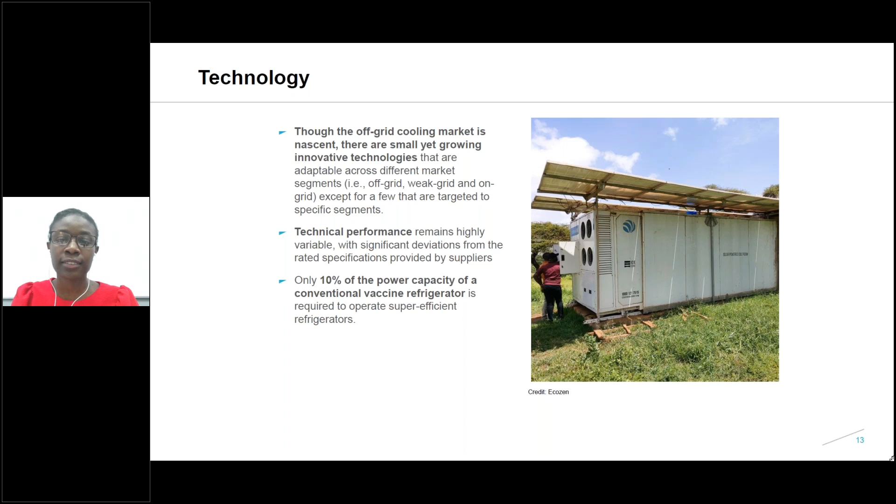And then in terms of the market, as I mentioned, the commercial markets for off-grid cooling solutions remain in their infancy, but overall, in terms of the market situation, we are seeing emergent business models aimed towards increasing access to these cooling services in communities that may not be able to afford buying the technologies outright, such as cooling as a service.

And then in terms of optimizing on the reach and trying to balance between business approaches so that companies are able to deploy this technology, we are seeing them employing a mix and combination of different business approaches.

And then looking at the supply of these cooling technologies, a lot of them currently have to be imported, especially in markets such as sub-Saharan Africa. And so that points to a real need to look into how to promote local manufacturing. And even in cases where we have local assembly outfits, the key cooling components and power components needed for these technologies still need to be imported into the countries, and that has implications for overall affordability.

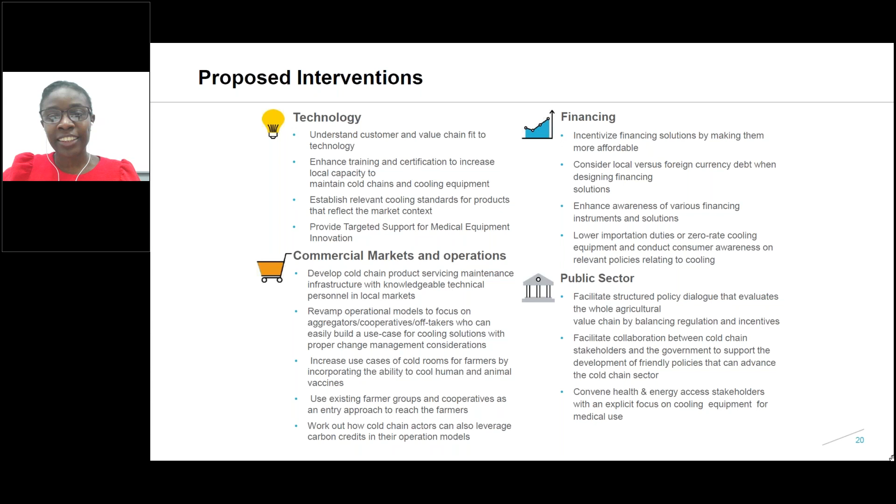Thank you so much, Ruth, for setting the scene and bringing many nuances of the cooling spectrum to our audiences, starting with technology, how to finance, and what roles the public sector could play, as well as how the private sector with farmers cooperatives and other NGOs can also come together to raise a voice and intervene more in the spectrum to form a more enabling environment for implementation of cooling technologies. Thanks a lot for this very informational intervention.

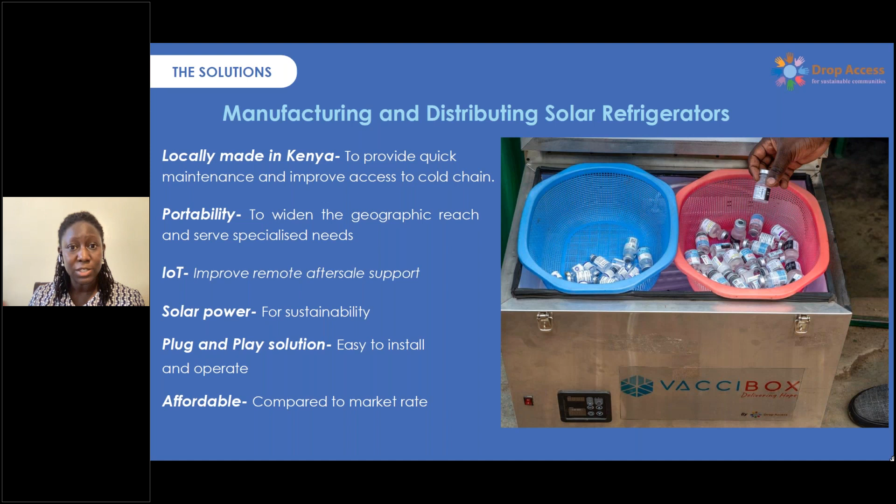And there's the issue of affordability. Cooling is still quite unaffordable. Look at the healthcare space in Kenya, where to get a solar refrigerator is upwards of 3,500 USD. For a rural community, a rural healthcare clinic that is level 2 and below, that's pretty much the entire cost of the facility. So it's quite unaffordable for them to get this cooling. Next slide, please.

Excuse me, I have a cold.

One of the products that we're offering here in Kenya is called the VacciBox. The VacciBox is a portable IoT-enabled solar refrigerator that is portable enough to be mounted on the motorbike, the bicycle, to be wheeled around, to be carted, just to improve the geographical reach. It's also solar powered to ensure that it's always running in real time, even on the bicycle; it has the battery backup that ensures the fridge is actually operating, keeping the vaccines at the best temperature as much as possible.

So VacciBox is also IoT monitored because we know it's not just enough to keep vaccines cold or even drugs cold. It's also equally important to ensure that we're able to build traceability and also ensure that monitoring standards have been put in place so that vaccines never go bad. And if they go bad, we're able to trace back and see what actually went wrong. Is it the battery? Was the door open for too long?

And these kinds of structures are helping to build traceability within the healthcare sector and helping governments like the government of Kenya to appropriately plan for healthcare programs. So the VacciBox goes for 2,000 USD, which is pretty much affordable compared to the 3,500 USD refrigerators for the healthcare sector. Next slide, please.

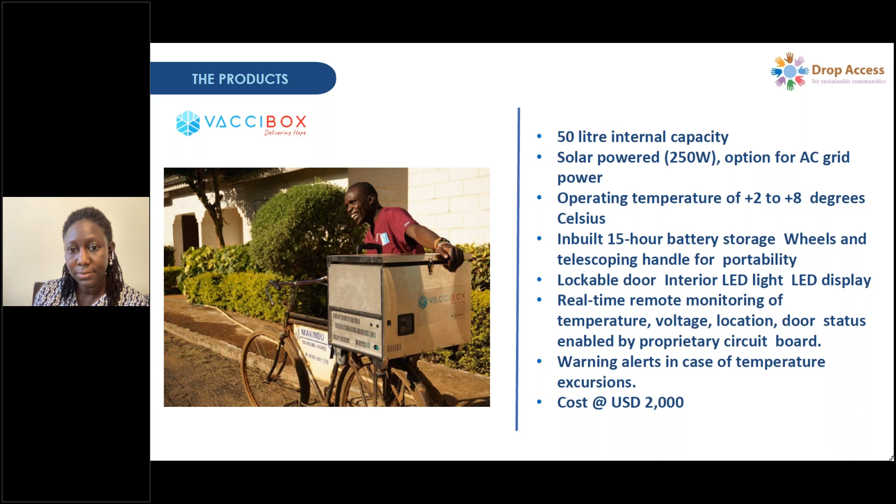So far, Drop Access has been able to manufacture quite a number of refrigerators. We are on the third iteration, going to the fourth by the end of this year, to just build a very robust product. But we're so lucky because we started this dream of building vaccine refrigerators here in Kenya. And we've been able to serve over 23 sites that are serving 50 plus communities here in Kenya with vaccines, with oxytocin for women who are in labor.

Our track record spans from providing vaccinations for children, COVID-19, ensuring that mothers actually do get a chance to have the baby at any time of the night or any day because there's oxytocin available, and also the other available medical items such as blood.

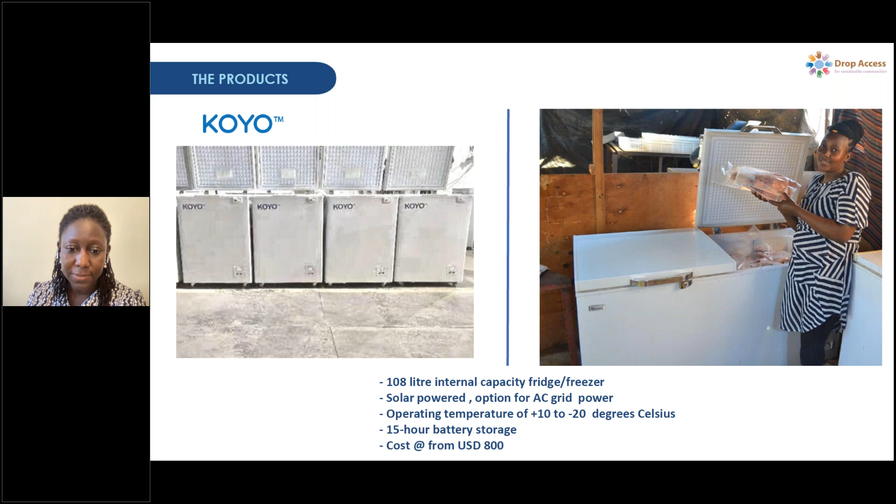Now, from the work that we've done, piloting VacciBox within the healthcare communities and also delivering Koyo in the food market in Kenya, what we've learned, or rather best practices that we see here, is that efficiency is key. The more efficient the technology is, the better it's going to serve the farmer. And also the better the food security is, but also it guarantees this farmer that the money they're putting out there purchasing this thing is actually worth it. And that, to me, I feel is a moral way of doing business within the energy space.

So we also see that we must integrate passive cooling technologies and energy storage. For us, we choose PCM as our energy storage because PCM is much more efficient and gives a better guarantee. For example, with the VacciBox, WHO recommends that the fridge must be able to maintain the cold for 3 days. Worst case scenario, the battery spoils, the solar is not working. To maintain 3 days, energy storage such as PCM comes in really, really handy. That must be integrated with this technology to ensure that the impact still continues beyond any wear and repair that has occurred in this refrigerator.

Another thing that we've learned is that monitoring and data analysis has to be part of the progress, to be able to track the energy consumption, the performance of the refrigerator, and also the efficiency of the cooling system. Not just for us as the manufacturer or as the technology provider, but also for the end user. Eventually, payment could be on a performance basis.

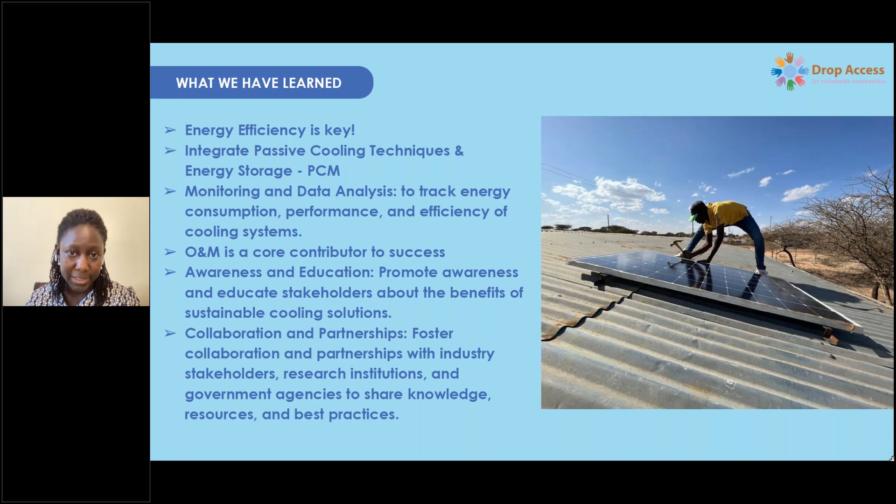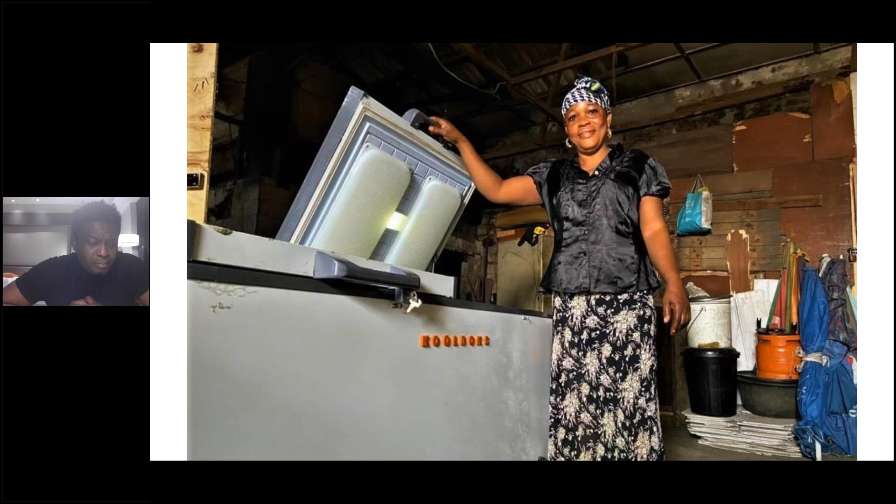So my name is Ayoola Dominic. I work for Koolboks as one of the co-founders, and we pride ourselves on the fact that we want to make refrigeration affordable and accessible to everyone that needs it. That's our main goal, basically. Next slide, please. I'll make it really short because I really want to focus on the case studies, who our customers are, what we do differently.

So this is Mama Ibadan. Mama Ibadan is one of the first customers we had. The first time I met Mama Ibadan, she told me that one of the best decisions she made in her life is actually getting a Koolboks solar freezer. She doesn't have to throw her frozen food away in the nearby river again. She said she now makes more money compared to before she got the Koolboks solar freezer. Next slide, please.

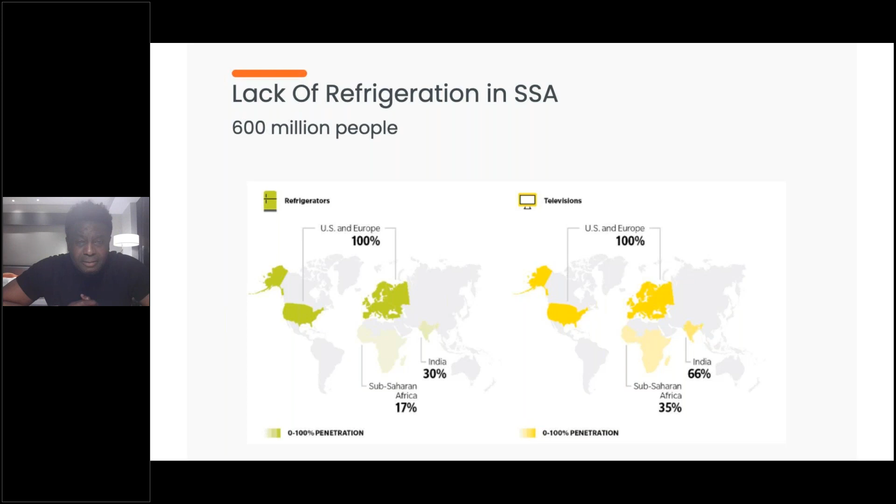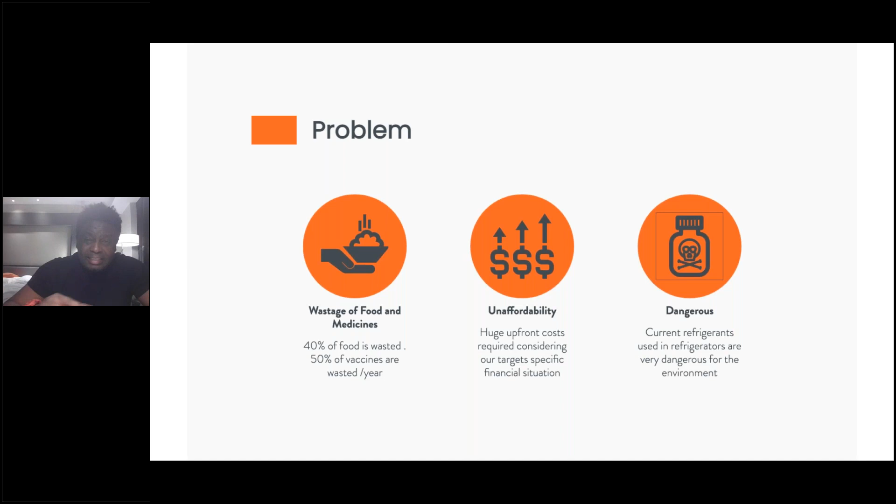So using the force of the sun and water, which is very abundant in sub-Saharan Africa, Koolboks created a unique solution that would generate refrigeration for up to 4 days, whether or not you have power or whether or not you have sunlight. And I'm sure you're wondering, what solution is this exactly? Next slide, please.

So using the unique properties of water and of course of the sun, which is extremely abundant in Africa, we created a solution that is able to generate refrigeration, whether or not you have sunlight or power, for up to 4 days. And this we did by storing energy in the form of ice rather than just in batteries. Next slide.

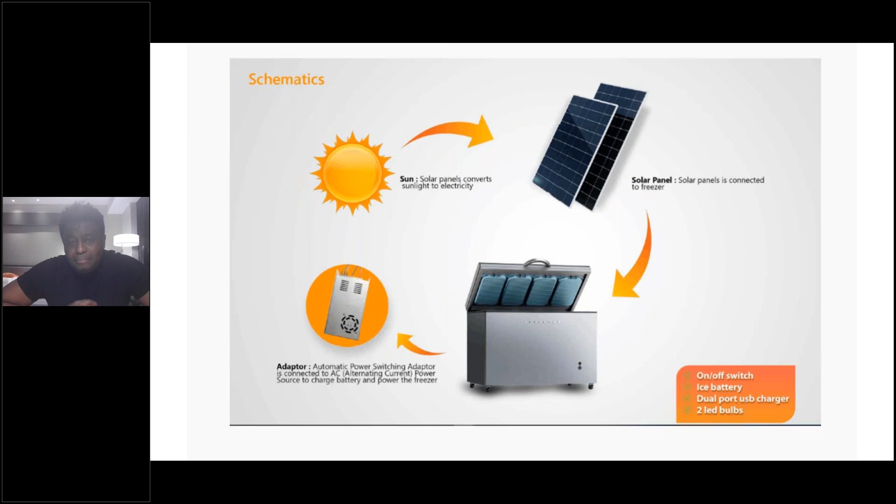And of course, we have different customers with different cooling needs. Some customers' priority is to cool drinks, some customers' priority is to cool frozen foods, or fresh foods. So it's not all customers that want to freeze, neither is it all customers that just want to refrigerate. And this brings us to the next phase of the innovation. Next, please.

So rather than just focus on customers that want to cool, we thought about people in aquaculture who want to actually freeze. By so doing, we integrated what we call ice batteries that are actually removable or replaceable. So no matter what your cooling need, you are able to use a Koolboks solar freezer. So whether you want to cool, that is farmers on the farm that want to cool fresh fruits, if you want to freeze, if you want to make ice blocks for sale, this is what we've been able to do. And if you look at the batteries, they're actually replaceable, depending on the capacity and the cooling needs of the customer. Next slide, please.

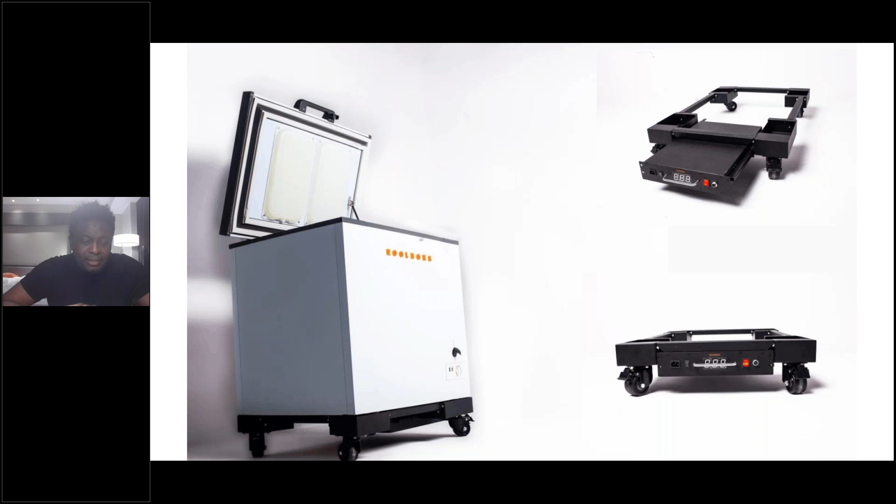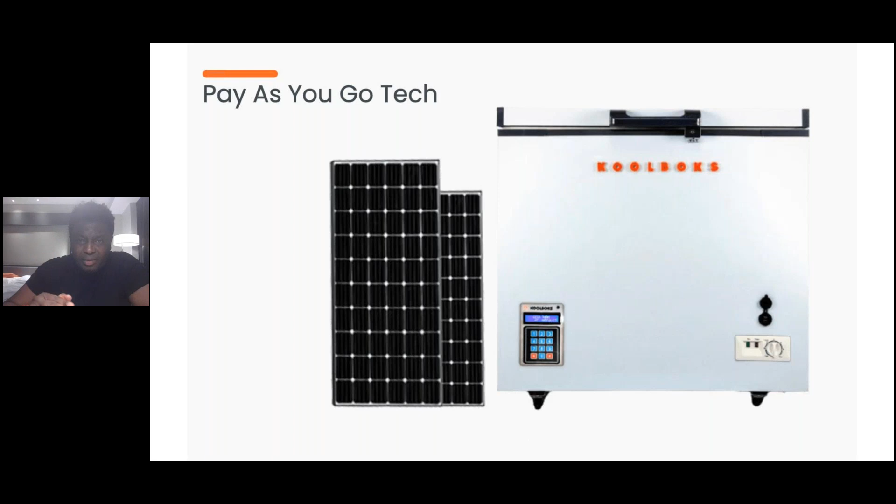So who are we and what have we done so far? Over the last, I would say 3 years, Koolboks has actually sold over 3,800 products globally with a 400% growth in Nigeria. We've signed about 18 B2B across 18 countries, including Danone, Orange, Baobab, and a couple of other customers. We've empowered over 1,700 small business owners, and we see value with our product with small business owners. Small business owners would include small restaurants, small holder farmers. 90% of Koolboks customers actually reported profitability and savings on operational costs. In fact, in Nigeria today, we've saved over 252,000 kilograms of food produce, and 996 women have reported being able to pay their children's school fees thanks to our technology. Next slide, please.

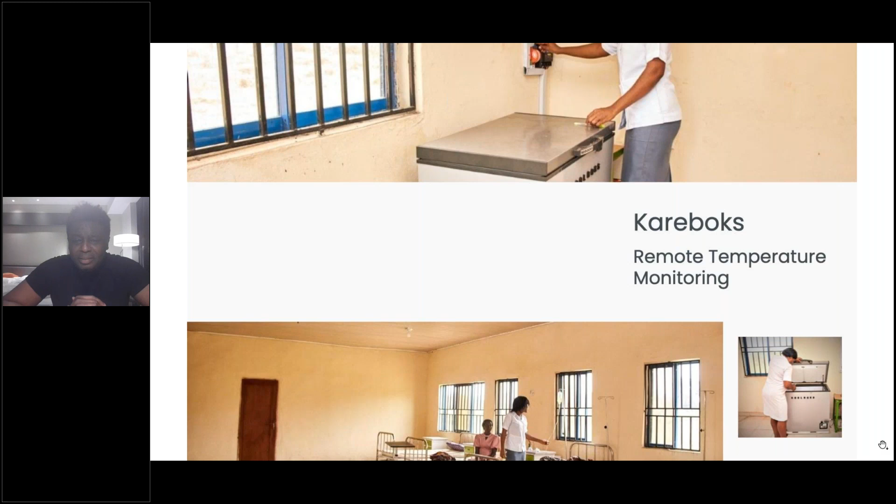All right. So I think my time is running out. I'll just make it quickly to my last slide. All right. So next slide. I think I have a few minutes to round up. Can you go to the next slide? Next slide, please.

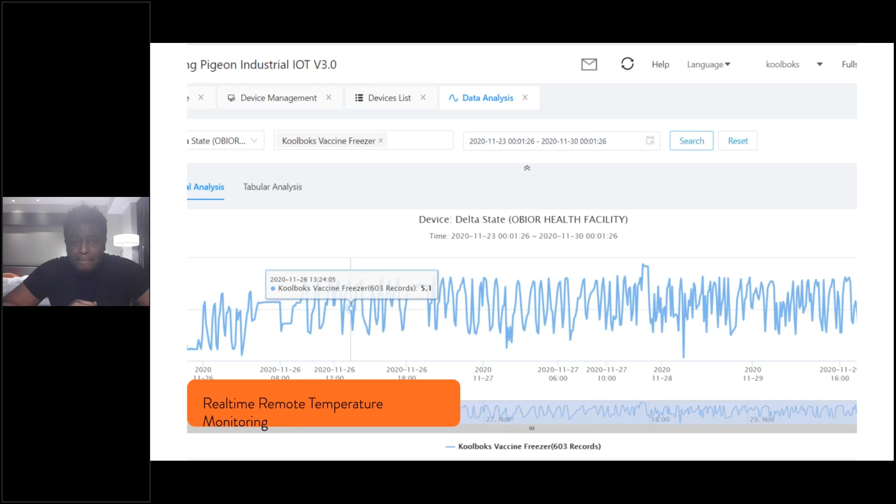So this is all about the data we get from our units, because they are IoT powered. We can actually get the temperature reading from all our systems in the field. The next slide, please. Next slide, please.

Thank you so much, Ayula, for presenting this very innovative cooling solution. I was pretty curious about the token system that you have implemented. I would also be curious to learn more about how they work from the implementation perspective after the webinar, maybe when we have an exchange.

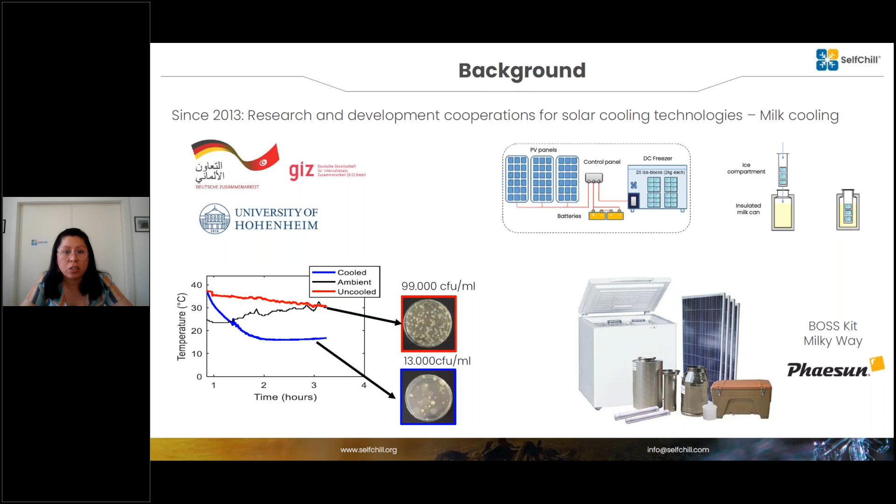Under this project, we also worked with the university under the PARI project, the GIZ, and Powering Agriculture. After the project ended, unfortunately, there were some issues regarding the maintenance of the technology. So this brings us to the challenges that we faced in this project. Next slide, please.

As I mentioned, on one side we have the negative effects usually caused by donations, where we found milk tanks of more than 2,000 liters capacity in places that have just 200 or 500 liters of milk production. This resulted in underutilization of the technology, and at the same time lowered the willingness to pay for new technologies in those regions. A second challenge was maintenance, as there were not many technicians, or the people doing installations were in remote areas, so it was very difficult to provide maintenance.

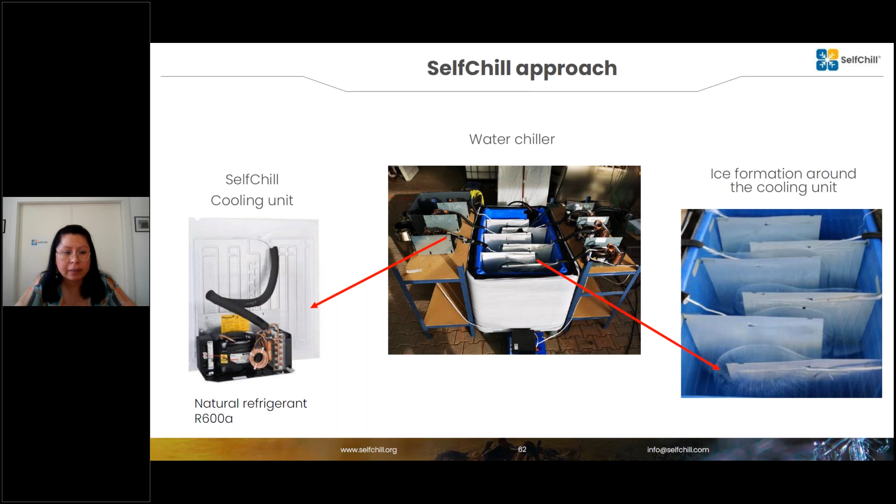As you can observe here, what is the idea of having this ice or this water chiller? Comparing with a conventional system, we place our PV panels connected to the system. The conventional solar cooling system on the left side shows us that we have an AC heat pump that is connected to a PV system and is providing the coolness to our cold room. However, bigger batteries are needed.

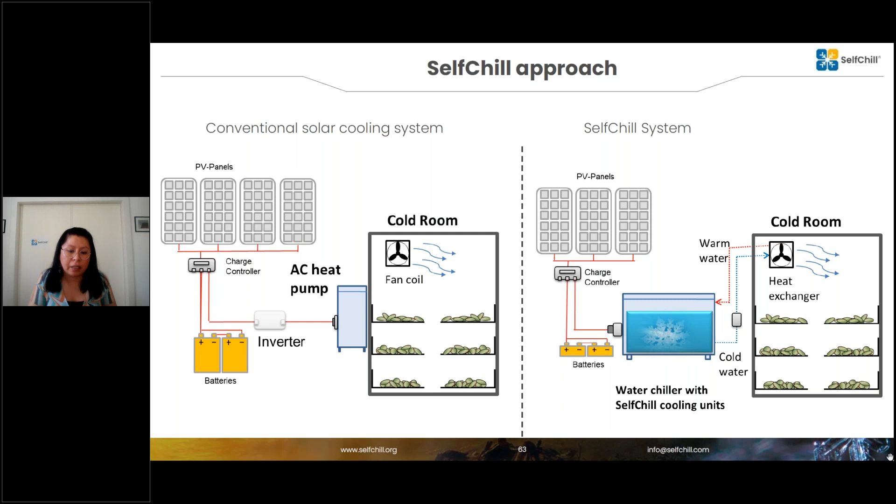In our system, as you saw in the previous slide, our water chiller is the one that connects the SelfChill cooling units to the PV system. And then this water is being recirculated in the cold room. So the difference here is that we are using a smaller battery compared to a conventional system, and at the same time we are storing our energy not only in an electrical way but also in a thermal way. Next slide, please.

So based on that, we have different systems. With the self-chill cooling units, we can develop different technologies like cold rooms, milk tanks, ice makers, battery cooling, and air conditioning. With that, we have the idea of promoting solar energy for different refrigeration approaches and targeting three values: the agricultural value chain, environmental protection, and sustainability through local value added. The idea is to just export the cooling units, and the rest of the components are mostly obtained locally. Next slide, please.

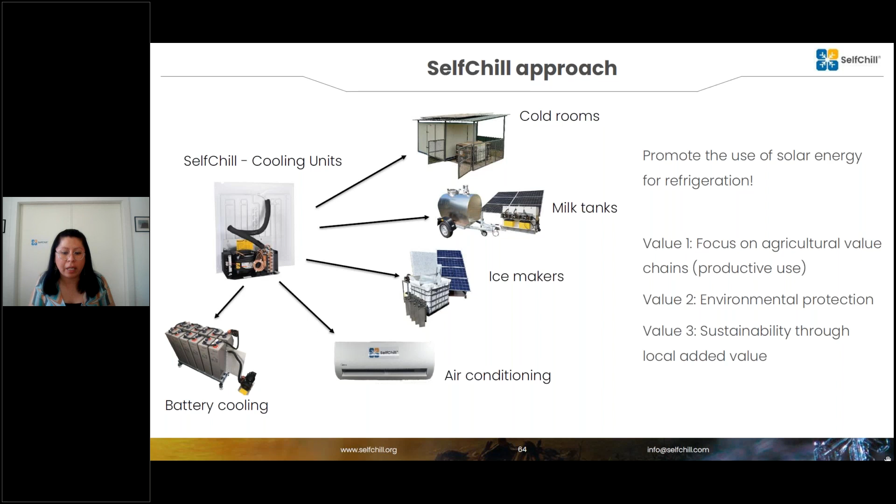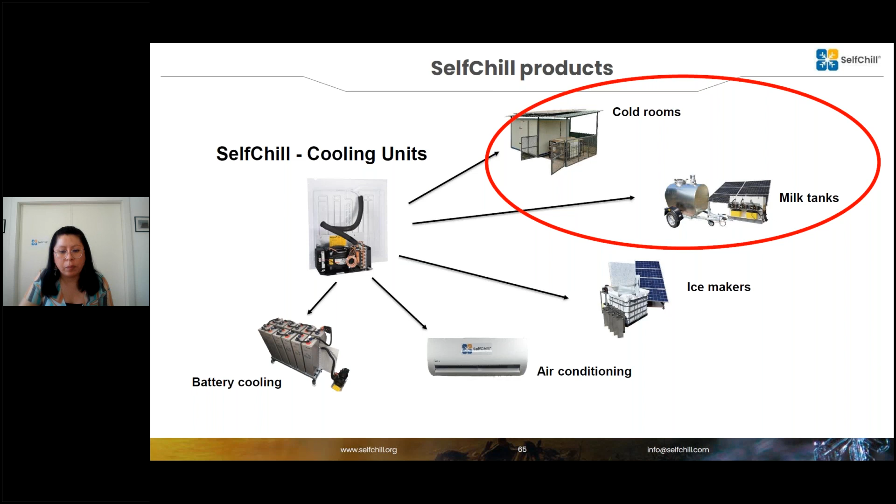Here, I want to explain a little bit about our main products, which are cold rooms and milk tanks. I will be giving you some examples. We have also promoted ice makers, air conditioning, and battery cooling, but this time I will be presenting these two examples. Next slide, please.

So coming to the self-chill cold room. The self-chill cold room in Kenya was installed at a farm gate, where the farmer exports different herbs and was having bigger losses, facing rejection of the product at the port. Then we worked together in a project, and we provided our modular solar cold room solution. The farmer has greenhouses where he was harvesting every 10 or 14 days, so there were days that the system was not utilized. Therefore, this farmer was renting the system to other farmers in order to preserve the quality of their products too.

This led us to a very good understanding: after using the cold room, the farmer was facing zero rejection at the port. This also helped us understand that as soon as we harvest the product, we really need to cool it down in order to preserve the quality. And with that, we were reducing the losses significantly. Next slide, please.

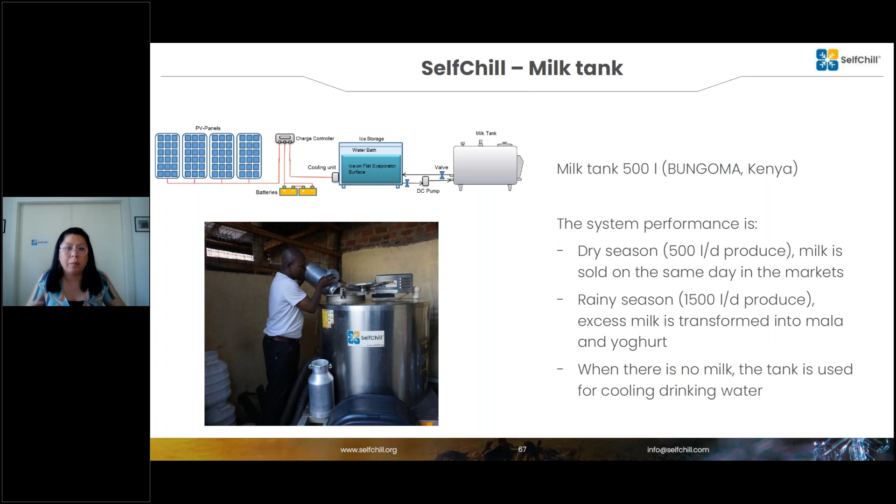In the case of the milk tank in Kenya, depending on the seasonality, we can have higher or lower production, but this gives us more flexibility in the utilization of the technology. When there was no product, the farmers were using this alternatively to cool down other products. In that way, they were making continuous use of the technology. Next slide, please.

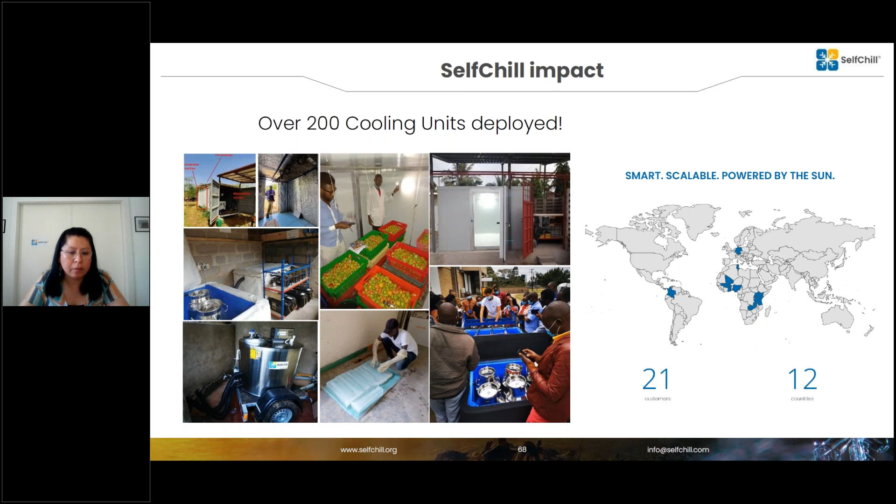Here you can see the impact of our technology: we deployed more than 200 cooling units around the world, targeting 12 countries in America and in Africa. Next slide, please.

And at the same time, as part of our approach is the training. We did training of more than 400 people on-site and online. Next slide, please.

And with this slide, I want to end my presentation, and you can visit our different projects, products, and services. Thank you very much. Thank you.

Thank you so much, Anna, for your kind intervention. And yeah, particularly what kept my attention was the metrics that you presented about the challenges. And I think that was a very impactful metrics, highlighting the four important aspects of what are the problems or what could be the problems.

And like you mentioned, the donations negatively impacted the willingness to pay from the consumer side. That's actually one of the grave problems. However, it doesn't sound that important, but quite a thing if we see it in a long run perspective, if we want to make the project scalable.

Thanks a lot for your intervention, and we would go to the next speaker with this, and that would be Mr. Emmanuel Bu from On Capital. And here we try to bring you the perspective of a financier supporting the cooling solutions of the different companies and of the different entities. Emmanuel, the floor is all yours. You've got 10 minutes, and yeah, please.